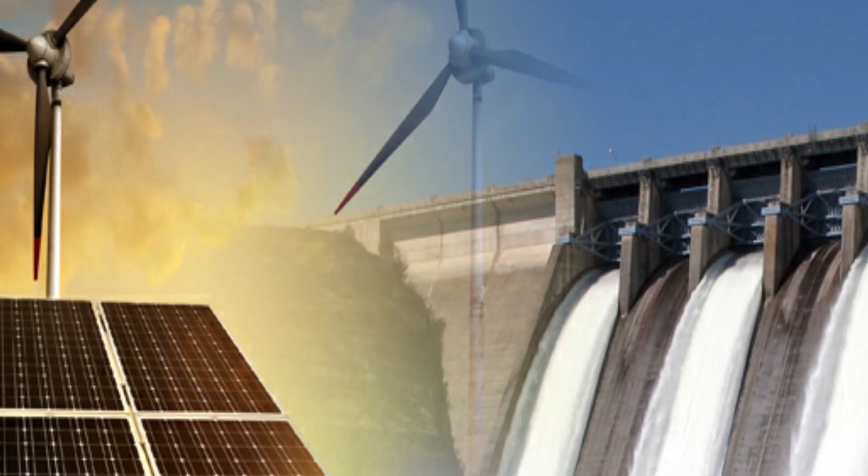Nowadays, demand of renewable energy sources is increasing in every country. If you take non-renewable energy sources like thermal power plant, nuclear power plant, etc., they are not good for the environment and they can exhaust any time in future due to lack of fuels. But if you take renewable energy sources, they are not like that. They are good for the environment and they can't exhaust any time in future.

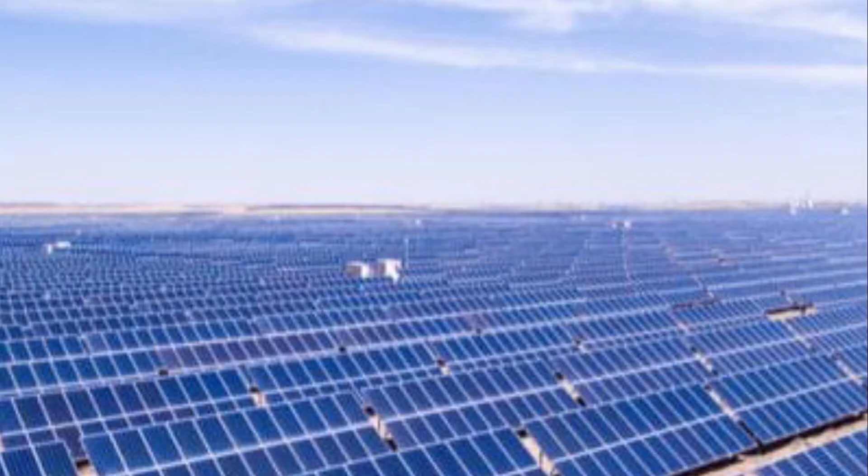Among all renewable energy sources, solar energy is used in more applications like solar homes, solar street lights, solar vehicles, etc., because it's easy to install, takes very less space, and requires low maintenance.

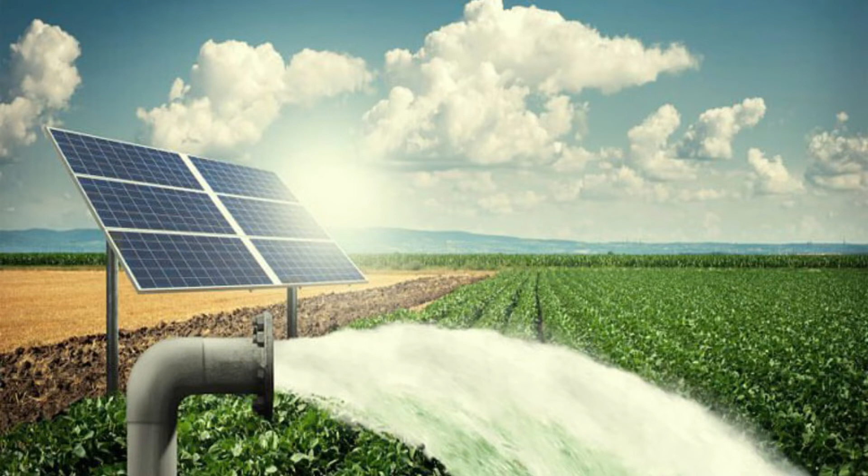So here my idea is like all other solar applications like solar home, solar street lights, solar vehicles. Here I am taking solar water pumping system, because we know water is required for drinking, irrigation, domestic use, for livestock, and for industrial use. So water pumping has become an indispensable task in day to day life.

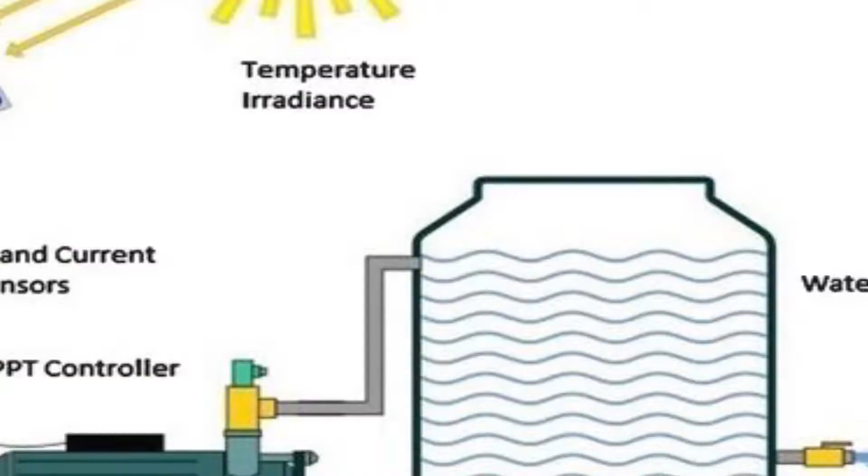If you run a water pumping system with solar, that can be a beautiful innovation. Actually, we have so many solar water pumping systems already existing now. But the problem with those solar water pumping systems is that the output of the solar system depends on irradiation and temperature. Actually, temperature and irradiation are changing with respect to time, they are not constant. But our load requires constant power.

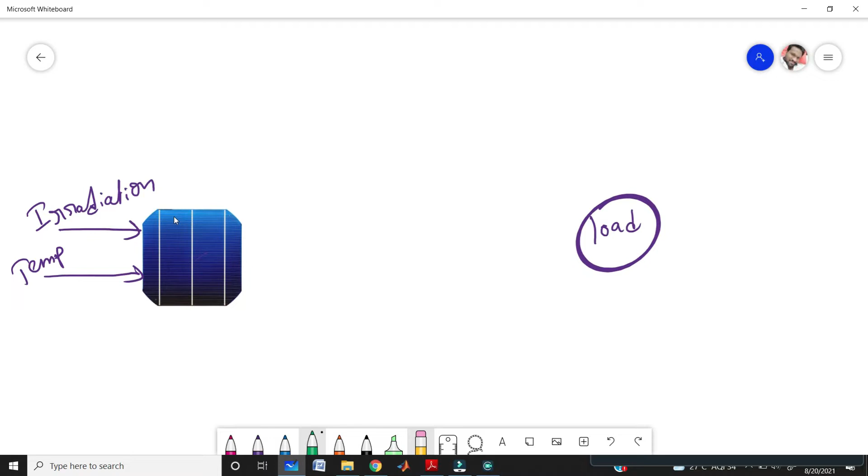What is our load? Here I am taking a water pumping system. Most of the water pumping systems use motors, nothing but induction motors. That's why here also I am taking the induction motor as my load. So we already know induction motor, or any load, requires constant supply, constant power.

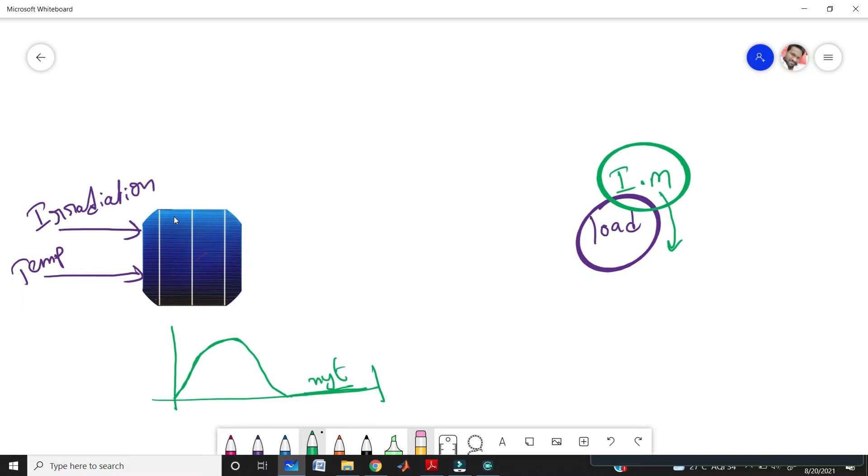But in our solar system, we are not getting constant voltage or power. We are getting variable power or voltage. If you take morning 6 to evening 6, it will increase, and in the afternoon you are getting the maximum power, and in the evening you will get low power, and at night time it does not give any power to the load. That is the solar system. So here we have two major drawbacks: we are not getting constant power at daytime, and also we are not getting power at night time.

So we need to eliminate these two drawbacks. To eliminate the second drawback, that is to give power at night time, we need to go for another alternative, nothing but another source. We have so many sources, you can take battery, you can take microgrid, like that.

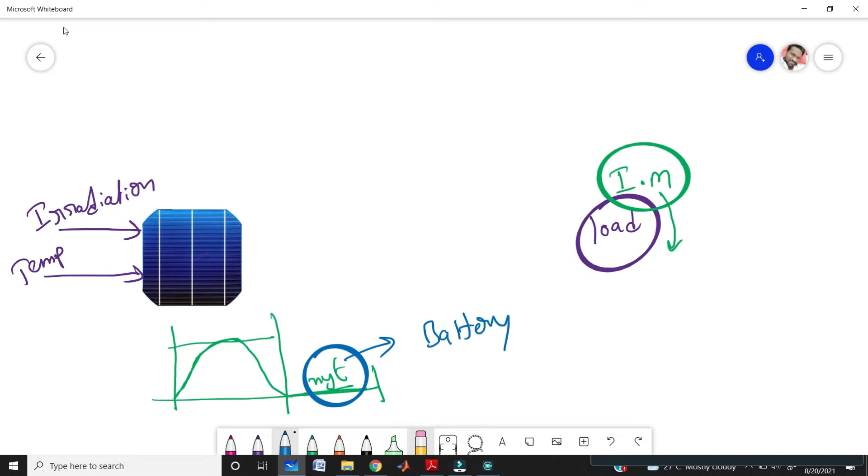So if you have an alternate source as battery, here my thought is, in daytime we already get power from the solar, right? So in that power we are storing in daytime, so at night time I can give this stored power to our load. So like this I am thinking.

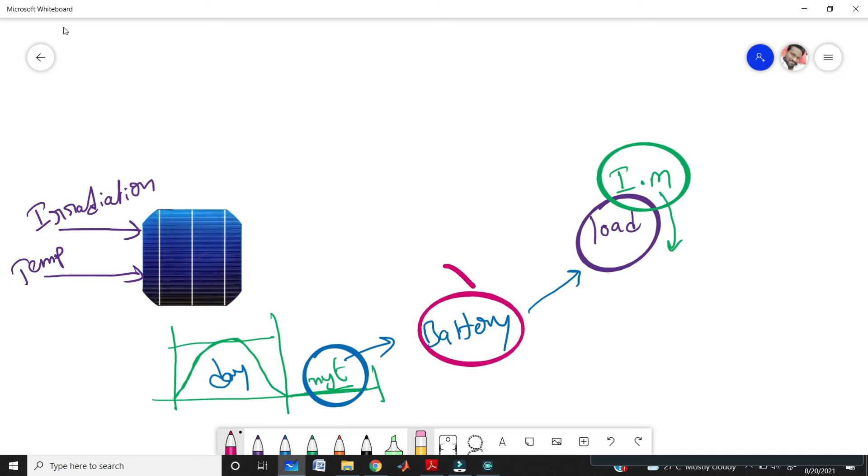But the problem with batteries is there are many complications, such as low life, hazardous waste, and you can see acid leakage in lead acid batteries. For these reasons we are not going to take batteries. We need to choose another alternative because batteries have some drawbacks.

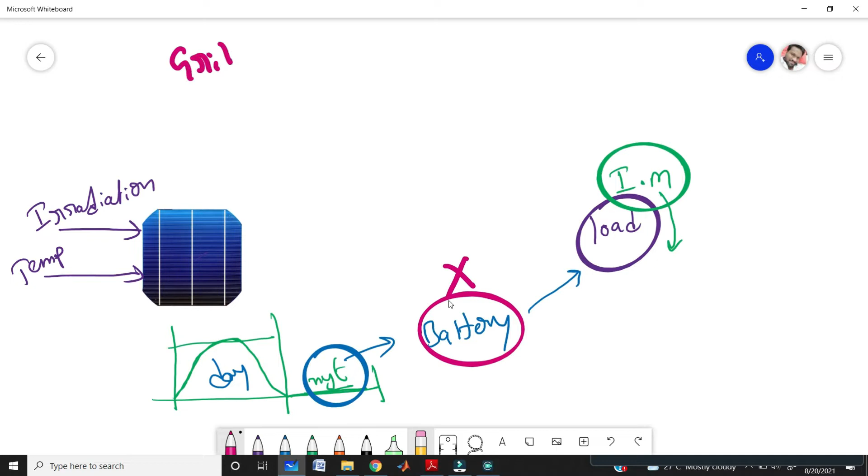That's why I am looking for a grid connected solar system. So here I am taking the grid, simply eliminating the second drawback, that is nothing but this nighttime drawback, with this grid, because we can get power from the grid at any time, right, to our load.

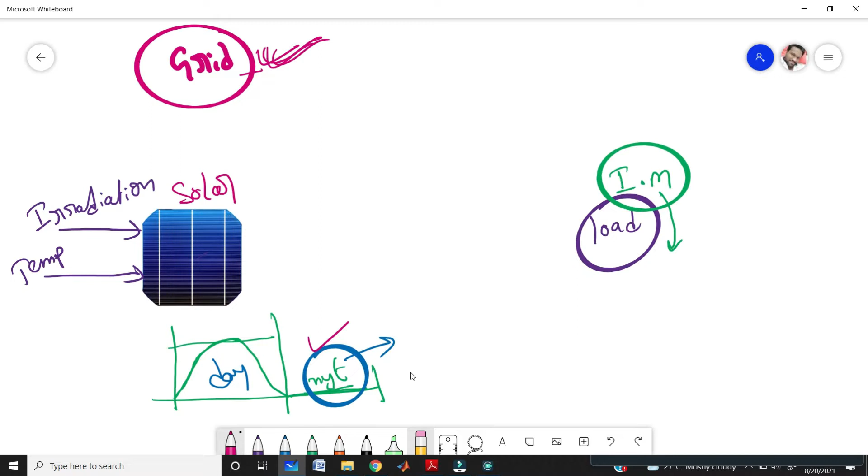But our main thing is we need to run our motor by using this solar power only. Whenever this solar power is not available, at that time only we need to depend on this grid. That is the main thing you need to know. At night time, and at daytime also, you are not getting the exact power required for our load in some cloudy conditions. In that time also we need to take power from the grid to match the load power. And the first drawback is, in daytime also you are not getting the constant supply, right?

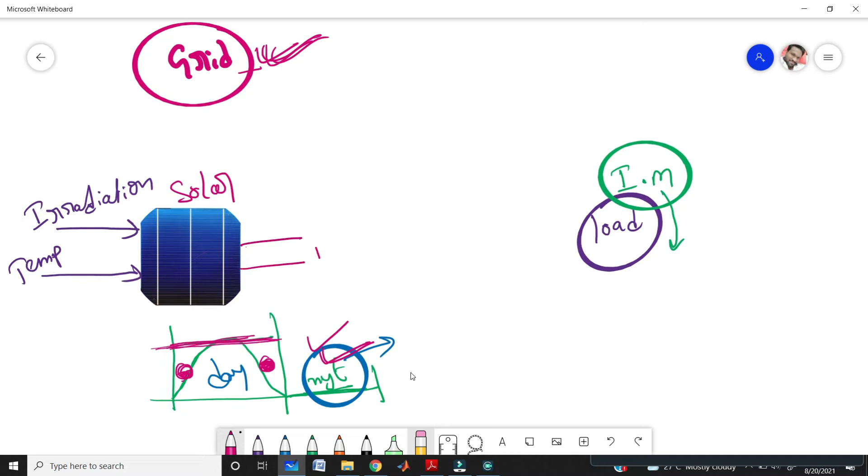So to meet the constant supply, or to meet the demand power, we need to use an MPPT technique with some boost converter. Why boost converter? Because in solar we are not getting the exact power what we required for our load, right? We are getting low power. So to extract maximum power from the solar panel, we need to use the maximum power point tracking technique with this boost converter. So by using these two devices, you can get the maximum power from the solar panel to meet the load requirement.

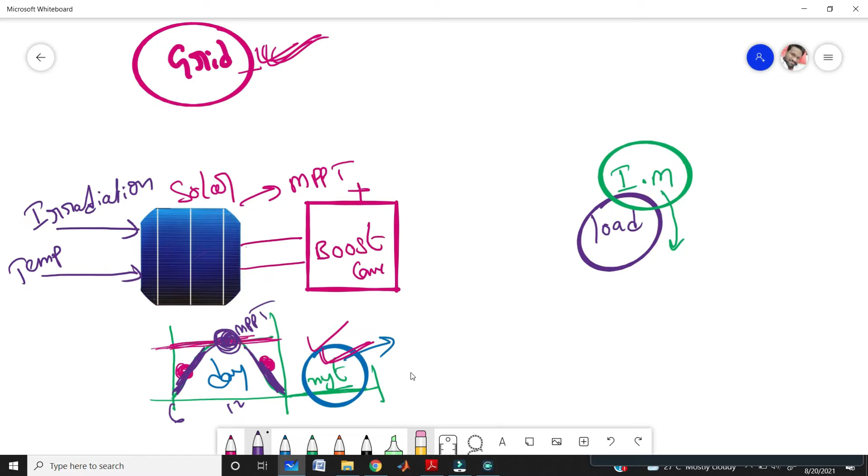Okay, because if you see this graph, from morning 6 to afternoon 12, you are not getting the maximum power. Whenever the irradiation and temperature are high, only at that point you are getting the maximum power. In remaining time, morning and evening, you are not getting the maximum power. So in that time you need to extract the maximum power available from your solar panel. For this condition we can use MPPT with our boost converter to increase the voltage level. So like this we can eliminate the first drawback also.

We have so many maximum power point tracking methods like incremental conductance, perturb and observe, and hill climbing, and so many others. But here I am preferring incremental conductance maximum power point tracking for our project. Why IC only? Because this MPPT is simple to handle and has good tracking efficiency. It also adjusts the step size automatically to reach the maximum power point and improves the response under steady state and dynamic conditions. That's why I am taking incremental conductance as our MPPT technique.

But the thing is, we know this induction motor - the name indicates induction means it needs AC, right? But we are getting DC as the output of the solar cell. After connecting this DC as input to the boost converter, at the output of the boost converter also you are getting DC. But our load, the induction motor, requires AC, right? So to convert this DC to AC, we need to connect a DC to AC converter, nothing but an inverter. After connecting this inverter, you will be able to get AC and you can give this AC to your induction motor. So here I am using a 3-phase inverter because our load is a 3-phase induction motor load. Why inverter here? To convert DC to AC we are using the inverter, because our induction motor needs AC only, not DC.

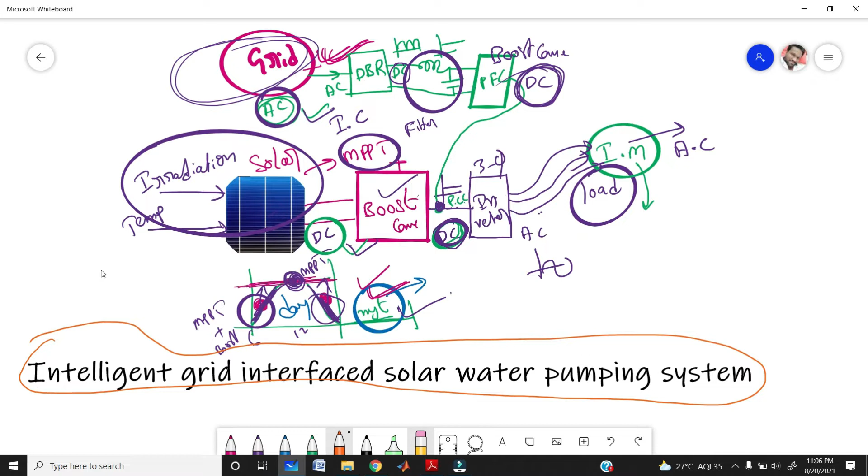So that's our title. Now you can easily understand our project title, which is intelligent grid interfaced solar water pumping system. Here we are interfacing grid with solar to our water pumping system, which is the induction motor. The power sharing between these two is in a very intelligent manner, meaning thinking manner. That's why I'm using the word intelligent, and that's why our title looks like this: intelligent grid interface solar water pumping system. I think now you can get a clear idea about the title justification, how you can justify your title like this at your presentation.

Now let's look into the circuit diagram. This is the main circuit diagram of our project. As I explained before, here they are taking solar power, and after that a boost converter with MPPT to get the maximum power from the solar system. Here you are getting DC, and after the boost converter also you are getting DC. But our induction motor requires AC, so to convert this DC to AC, they use an inverter, which is the three-phase inverter. This three-phase inverter converts DC to AC, which is then given to our induction motor.

Coming to the alternative source, that is the grid. Here I am taking it towards the AC grid, since the name itself indicates it is AC. But to connect this AC to our solar system, you need to convert this AC to DC, so I'm using a diode bridge rectifier to convert AC to DC. But at the bridge rectifier output, you don't get pure DC, only pulsating DC. So to convert this pulsating DC into pure DC, we need some filters. This is the LC filter I am using here, a passive filter, to convert the pulsating DC into pure DC.

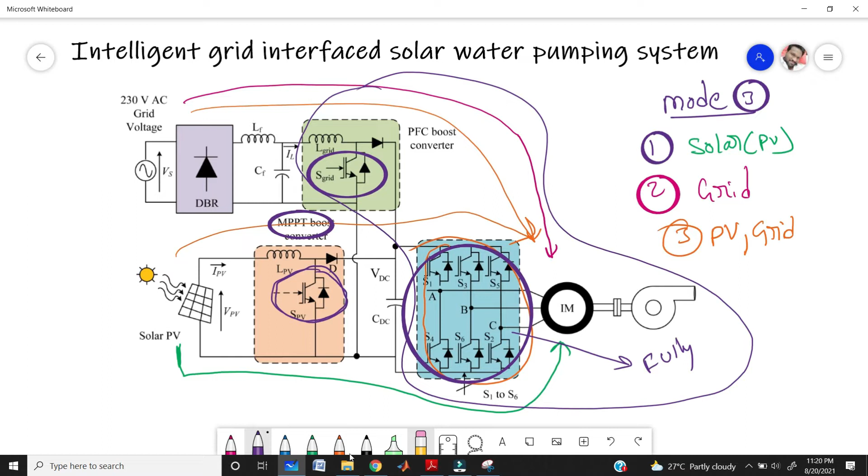So to generate these pulses we have the pulse width modulation technique, PWM technique. In PWM techniques we have so many types. Here I am using the sinusoidal pulse width modulation technique in our project, because that is very simple and very easy to generate.

The main process of sinusoidal pulse width modulation is, the name itself indicates sinusoidal. In sinusoidal PWM we have two waves: one is the reference wave, and it is always a sine wave as the reference wave in sinusoidal PWM, that's why the name indicates sinusoidal pulse width modulation. The other wave can be whatever you want - triangular, trapezoidal, sawtooth, whatever it may be. This second wave is the carrier wave.

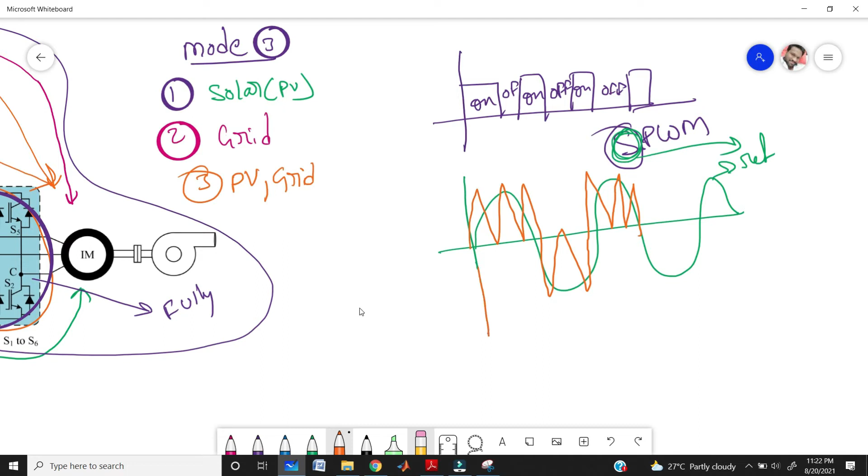In pulse width modulation we can give conditions. Whenever the carrier wave is greater than the reference wave, we turn on the switch - this is the first condition. The second condition is, whenever the carrier wave is less than the reference wave, we need to turn off our switch. Like this you can give the conditions.

So if you take from 0 to some time t1, at this time, is the reference wave greater or the carrier wave greater? Obviously the carrier wave is greater, right? So the first condition is true, then the switch will be on. So during 0 to t1, switch 1 will be on. And during the next time interval, is the reference wave more or the carrier wave more? Obviously the reference wave is more.

Means the second condition is true, that is nothing but the switch is off. And next interval, again carrier wave is more, again switch will be on. Again off, on, off, on, off. So like this you can generate your switching pulses.

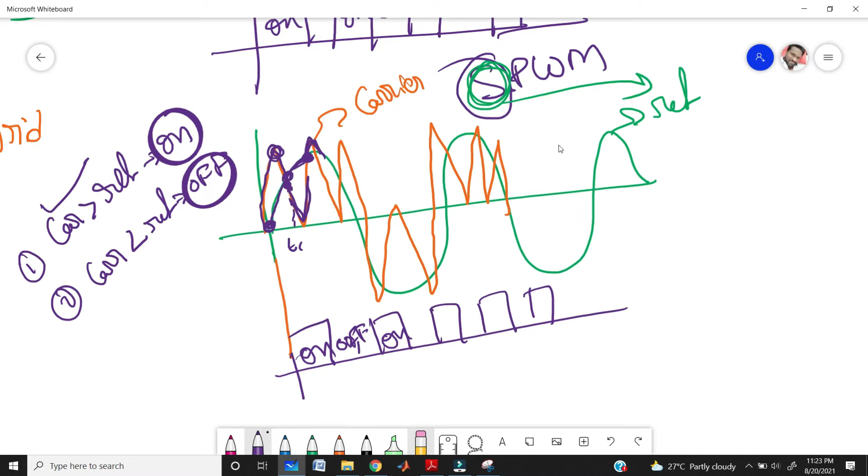In our project we need to get two values, that is nothing but the reference value and the second one is carrier value. So how we can get these two values? From the control system you can get these two values. If you take any control system, it will be like this only. You can take some positive here and some negative here, and give it to some PI controller, PR controller, whatever it may be, and give it to your switching pulses, nothing but on off like that.

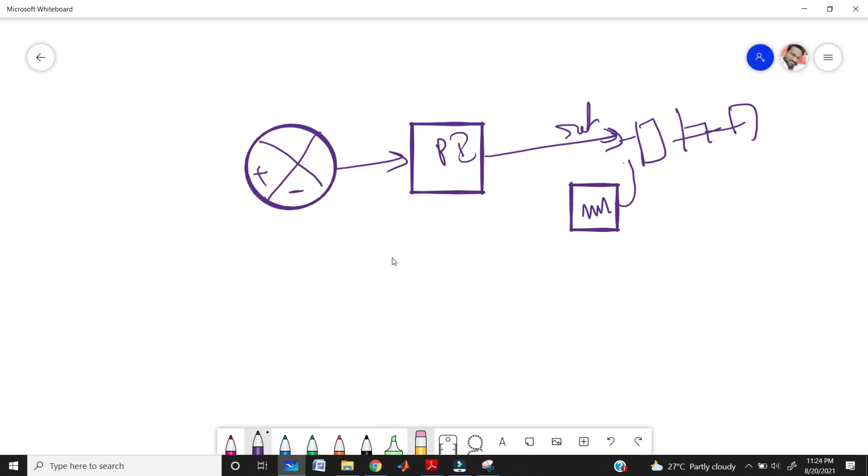So here this is the reference value you can get, and we need to take one carrier value, that is nothing but you can take another separate block like sawtooth or carrier wave, like that. Then you can give it to the less than greater than condition and give it to switching pulses. This is the common control system block.

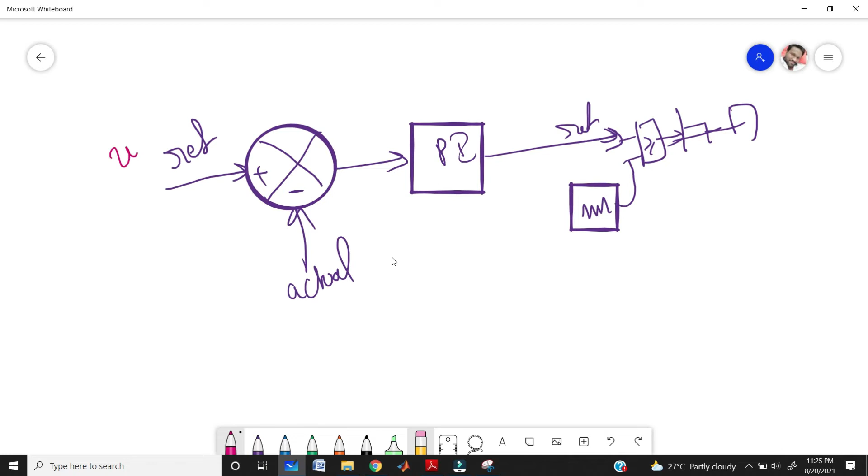So here in positive you can take it as a reference value, and in negative you can take the actual value. Reference value is nothing but whatever you want at the load. Our motor rating is 240 volts AC, then that is the reference value. And what is the actual value? The actual voltage you are getting at that point.

Means at morning 9 a.m., whatever power you are getting from the solar system, that is the actual value. It's 100 volts, but you need 240. So this is plus and this is minus. Then you will get 240 minus 100. The error is 140. So here you are getting the error value of 140.

So then this PI control will tell our system that because you are not getting the exact voltage, you need to depend on another source. So here grid will be on, and the remaining voltage will be taken from the grid. So like this the control system will operate.

So at another condition, at 12 o'clock, if you get the exact power of 240 volts, at that time this is 240 volts and the actual voltage also you are getting is 240 volts. So here the error will be 0, right? So here you are not getting any error, meaning you are getting the exact power required for your load. So here there's no need to depend on the grid.

So like this, with the help of this control system, you can control the whole system. Here I am taking only voltage as an example, but like this you can control the current also. Okay, so let's see our complete control diagram.

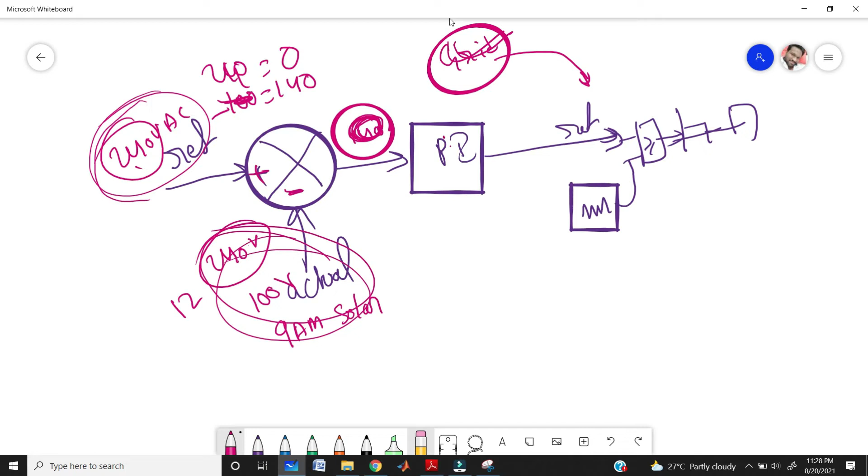So this is our complete control diagram for our system. Here you can use scalar or voltage frequency control algorithm. So just before I explained for only voltage, so like this they are also taking the voltage VDC reference and VDC actual. Like this they also take the current IL reference and IL actual.

Okay, and give it to the PI controllers. So this is the PI controller I am taking here, and this is another PI controller I am taking here. Okay, and we will give it to the pulse width modulation generation, nothing but this is the carrier wave, as I already told you.

You can take sawtooth, trapezoidal, triangular, whatever it may be, and this is the actual value we are getting, nothing but the reference value. Okay, and this is the carrier value. So we can give it to the less than greater than condition, and we can turn on and turn off the switches. That's it. The bottom also you can generate the pulses.

So here I am taking the solar panel voltage and solar panel current. I am getting the solar panel power because we know P is equal to V into I. That's why I am taking voltage and current and I will give it to the multiply operator. Then you will get the PPV.

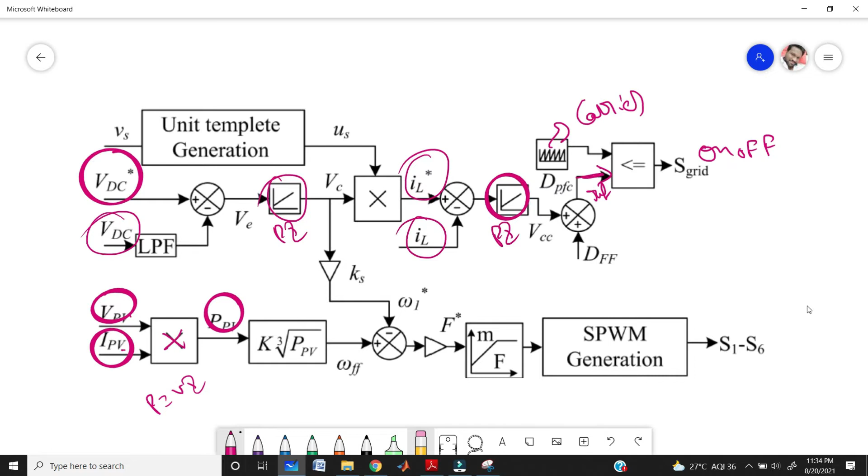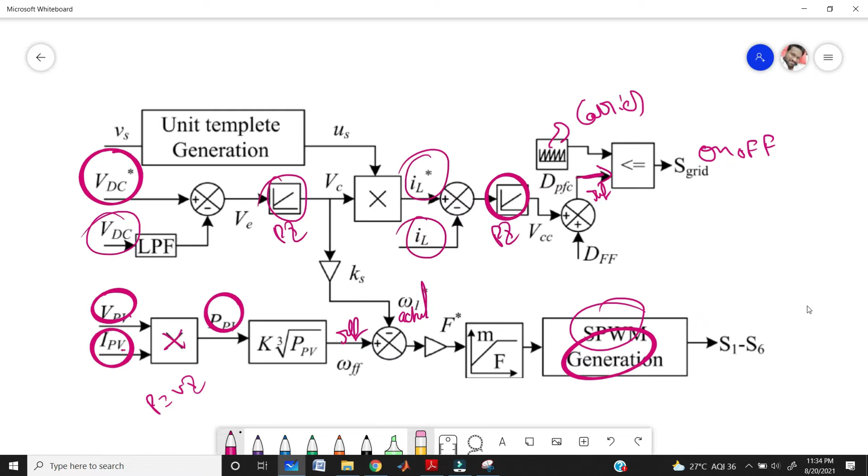So solar panel power I am getting here, and this I am taking as the reference, and here I am taking this as the actual. Okay, and again I am giving it to the sinusoidal pulse width modulation, and I am generating the switches for our inverter. That's it. This is the simple control technique I am using here.

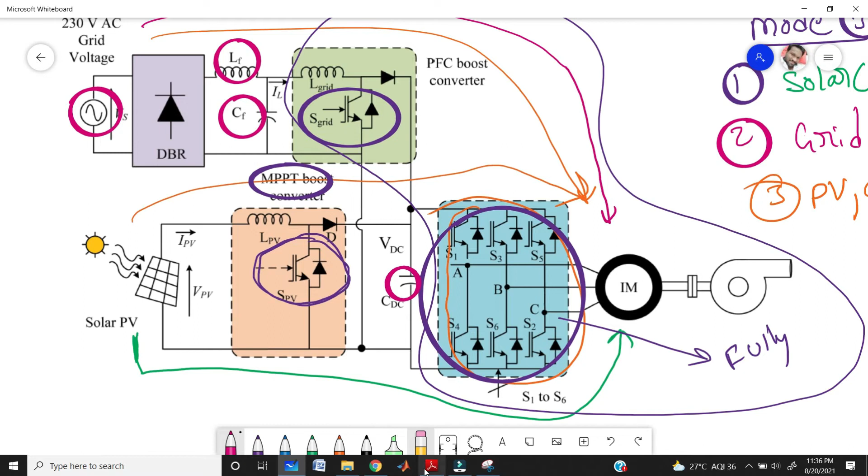I will provide one table. Here is our design parameter table. First of all, you need to generate the reference DC voltage, that is VDC reference, because it has the star mark. We know the expression VDC is equal to 2 root 2 VLL by root 3. We know VLL is nothing but the grid voltage, 230 volts. If you take this VLL 230 here, 2 root 2 into 230 by root 3, then you will get 375.6 volts. That is the calculated value, and you can use the nearer round figure value, 400 volts.

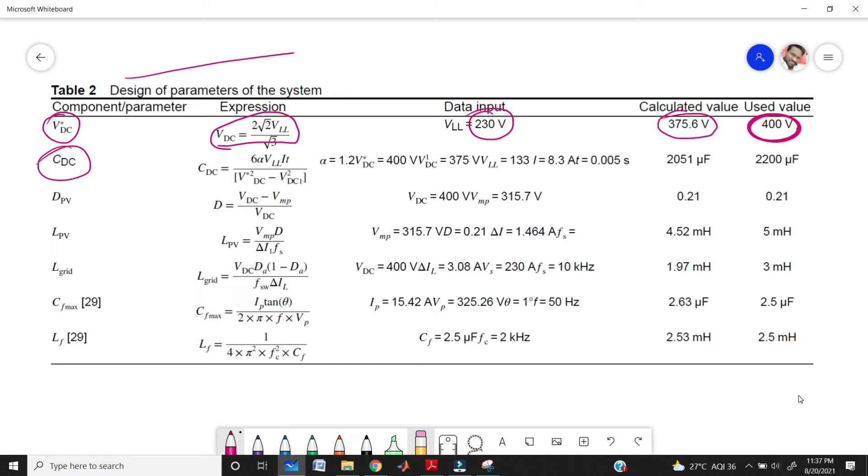Coming to CDC, capacitor of DC. You can see this CDC in our circuit diagram, this is the DC link capacitor. So this is the CDC, right? Here we have the CDC. This value I have calculated here.

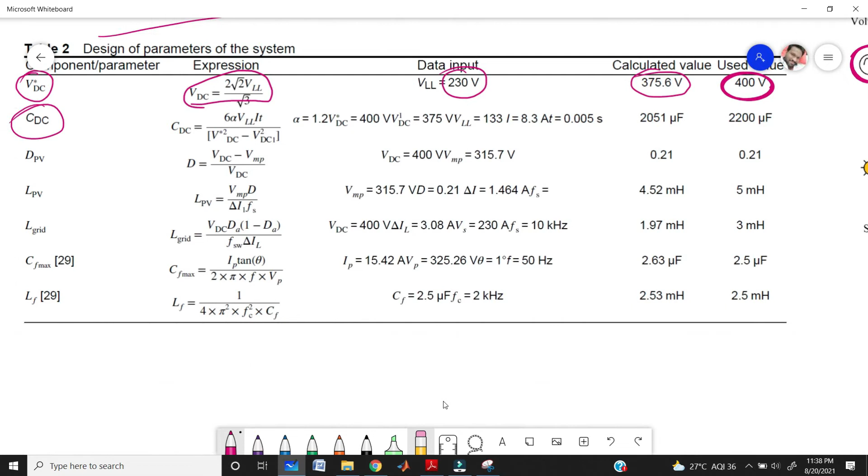CDC formula is 6 alpha VLL into I of T, by V reference square minus V actual square. We know each and every value here. Alpha is equal to 1.2. I am taking reference DC voltage we already calculated before, 400 volts. You can take 400, VDC actual as 375, line to line voltage is 133, I is equal to 8.3, and T is equal to 0.005 seconds. If you take all these values in this equation, you will get 2051 microfarads. So you can take 2200 microfarads. This is the capacitor of DC link.

Coming to the D of PV, we know the formula D is equal to VDC minus VMP by VDC. We know the VDC value we just calculated, 400 volts. You can take 400 volts, and VMP is 315.7 volts. Using these two values, you will get 0.21.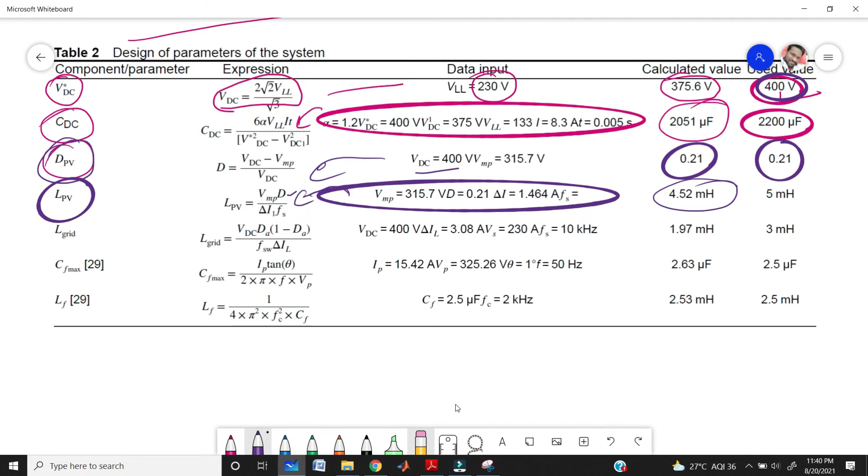Coming to the LPV, this is the inductance of the solar panel. That inductance of solar panel you can get from VMP into D by delta I1 into Fs. We know each and every value here, the VMP value, D value, and delta I value. Put these values in, then you will get 4.52 millihenry. You can take 5 millihenry in our simulation block, then you will get the inductor value. So here we have the LPV, right? This is the LPV value.

And coming to the grid side inductor, this is the formula. Each and everything I will provide you, don't worry. I will give this base paper in the description, you can download it, and in that you can get each and every value like this. I will give it in the description, don't worry. Like this you can calculate each and every element value.

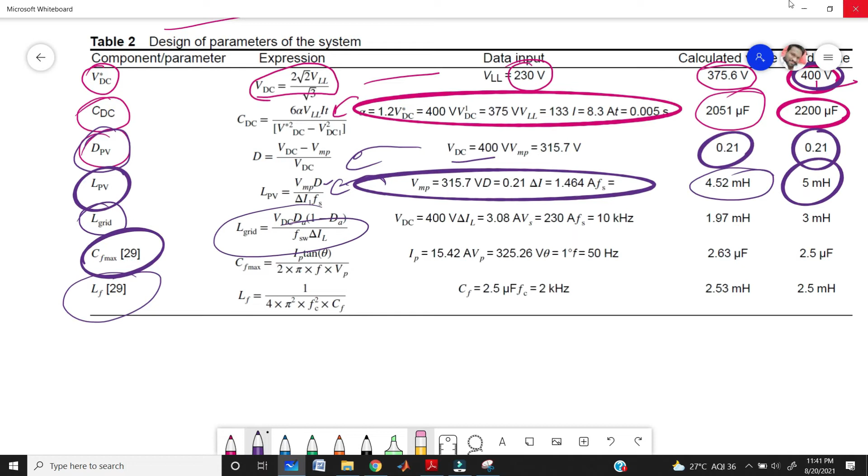And coming to the solar power designing, you need some parameters to design the solar panel also. This is the table for solar panel designing purpose. Here they are giving the parameters and specifications also.

The maximum power module is 210 watts, open circuit voltage is 35.7 volts, and short circuit current is 7.99 amps. They have given the number of modules connected in series and parallel as 11 and 1. They also give the voltage and current of the solar power array at maximum power point tracking: 315.7 volts and 7.32 amps at maximum power point. They also give the maximum power of the SPV array, that is 2.3 kilowatt. Like this they give each and every parameter of the solar panel.

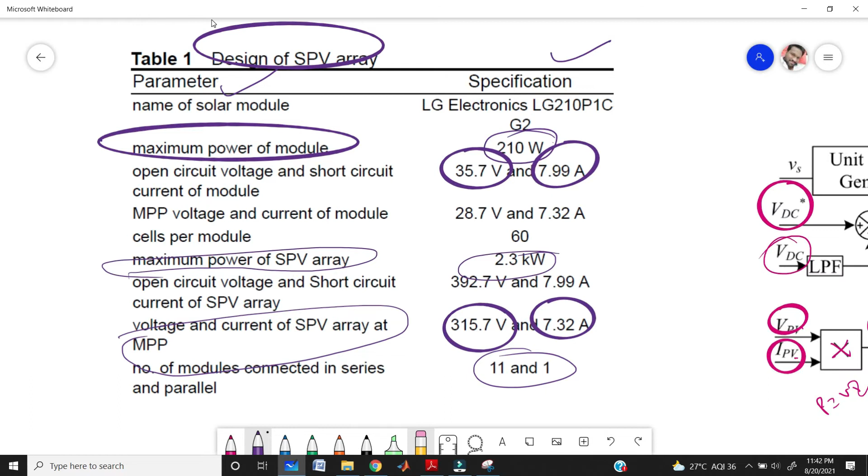So by using this you can easily design your circuit. Now you can see the results. After doing this project you can get results like this.

These are the starting characteristics of a solar pump in mode 1. We have 3 modes, right? In the first mode, as I already told you, only solar cell operates. Here the grid is completely off.

That's why you can see grid voltage and grid current are completely zero. These two, the grid voltage and grid current, are zero because in mode 1 we only get the power from the solar. We are not getting power from the grid.

You can see the motor is started in a soft manner to limit the starting current. So the motor speed is starting in a smooth manner, and after that it will settle at 1200 rpm. The reference speed is calculated by the control scheme, and at 8.6 seconds this point is reached.

Here VPV and IPV are settled to their maximum power point tracking. Only the IPV and VPV give the maximum power here, and they are at steady state. Up to this value it will be increasing - this voltage and current of the solar panel is increasing. At some point it will get the maximum power, and at this point only it will be steady state, at the 8.6 seconds time.

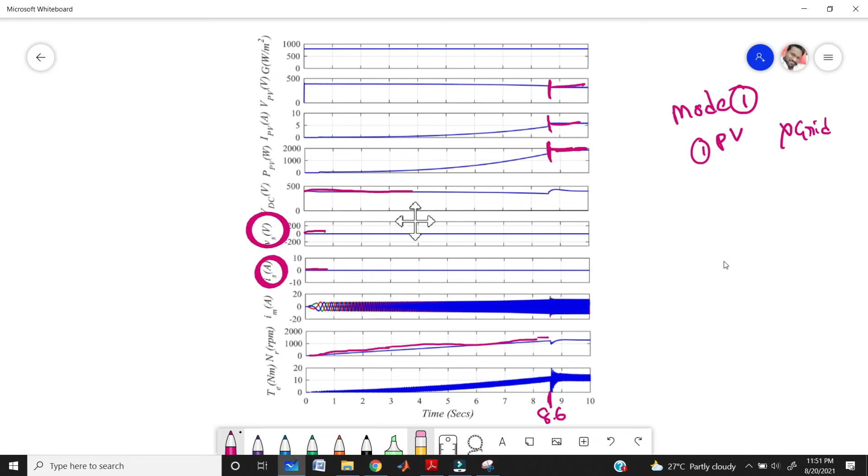The DC bus voltage is maintained to a constant value, which is 400 volts. This 400 volts we are maintaining as a constant value. Now coming to the dynamic state - this is the steady state, and coming to the dynamic state, how will it be?

This is also mode 1, but here we are taking the dynamic state. As I already told you, in mode 1 the grid is completely off, such that Vs and Is are 0, because we don't turn on our grid. We are only depending on our solar system. This is G, the radiation of the solar system. This is the voltage, this is the current, and this is the power of the solar. This is the DC link voltage, and at the bottom are motor current, motor speed, and motor torque. This is the dynamic state - dynamic state means, as the name indicates, it will be changing with respect to time.

Here the slope decrease in radiation is observed at t equals 2 seconds to 3 seconds. You can observe the slope decrease in radiation from 800 to 400 during this time. Again from 3 to 4 seconds, the radiation is increased from 400 to 800. So it keeps changing with respect to time.

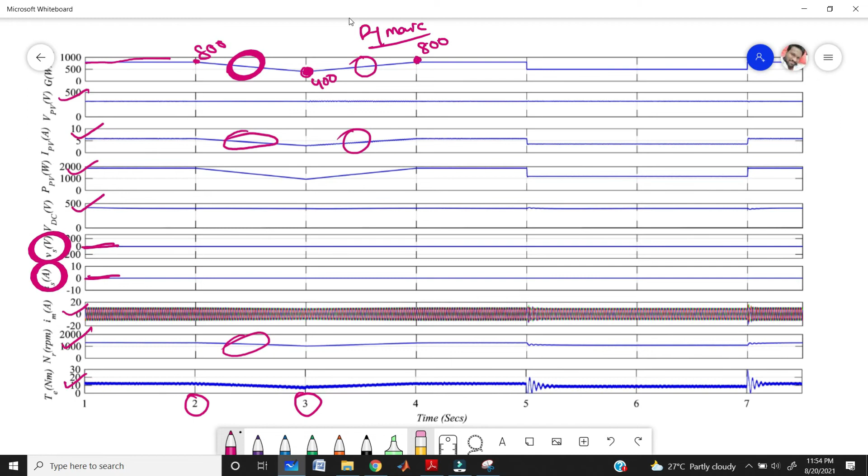With the decrease in radiation, the current of the solar system decreases, as well as the motor speed also decreases. Again as the irradiation increases, the solar current also increases, and the speed of the motor also increases. That's it - these are the characteristics of the dynamic state in mode 1.

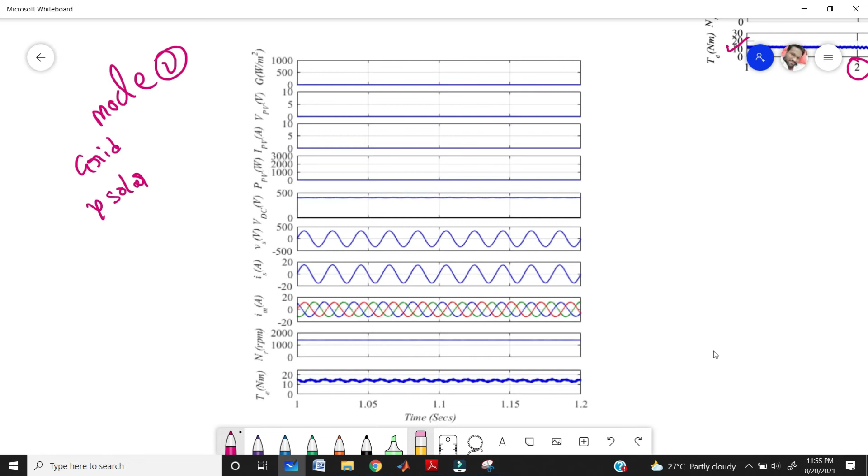Coming to mode 2, these are the mode 2 characteristics, this is also steady state performance. As I already told you, in mode 2 only the grid is connected. Here completely the solar system is off, because you can take it as night time - in night time we don't get power from the solar. That's why the complete irradiation and solar voltage, solar current and solar power are all 0.

This is because we are taking mode 2. In mode 2 the solar system is completely off, that's why you are not getting anything from solar. But you can get the DC link voltage as 400 constant, because you can take power from the grid.

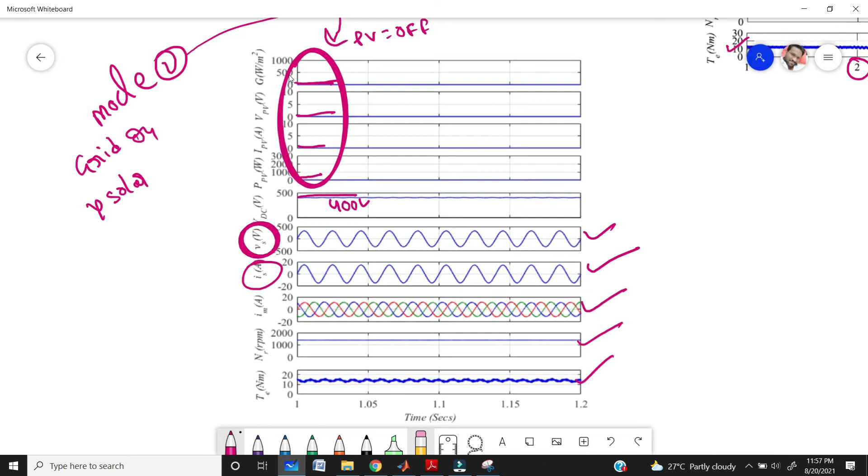This is the grid voltage and this is the grid current - the grid will be on here. As I already told you, grid is in AC format, that's why you are getting the AC voltage and AC current like this. This is the current of the induction motor, this is the speed, and this is the torque. This is the steady state condition, that's why it is not changing with respect to time - it will be constant all the time. That's it, this is the mode 2 operation.

Coming to mode 3, this is the mode 3 dynamic operation. Here in mode 3, as I already told you, both PV and grid will be connected, so we can get the power from the solar and also get the power from the grid.

Okay, so here you can observe from 2 to 3 seconds, irradiation will be decreasing and also current will be decreasing, and also here during 3 to 4, irradiation will be increasing and current will be increasing. But at this mode it can't affect the motor speed. Motor speed is always constant because the remaining power is taken from the grid.

You can observe here from 2 to 3, whenever the current is decreasing, then the current of the grid is increasing, right? So that is covered here. Whenever the current is increasing from 3 to 4, that is also covered here, where grid current will be decreasing. So it can't be effect on the motor. Always motor speed will be constant.

That is the use of power sharing between the two sources. Whenever you get the constant voltage, our waveform will be constant. Whenever changes occur, at that time only current changes, but our speed will be constant. That is the main thing you need to know. And all this came due to that control block only. Whenever the current and voltage changes, we need to change the step size and keep our motor speed constant. That is the main thing you need to know.

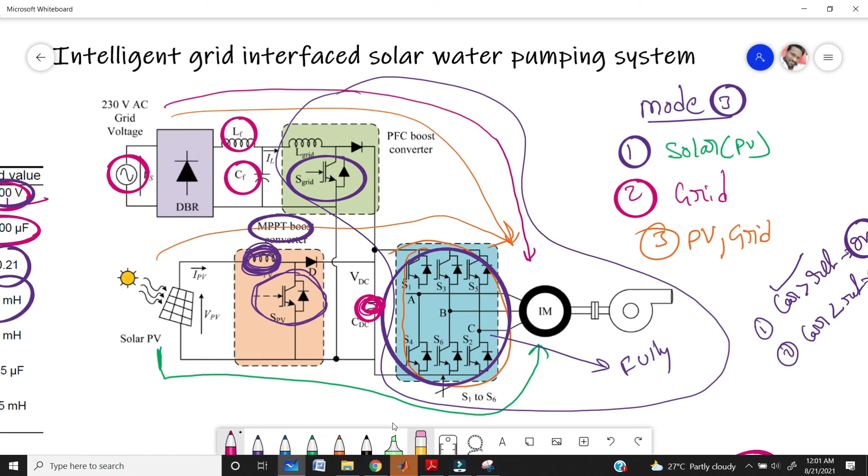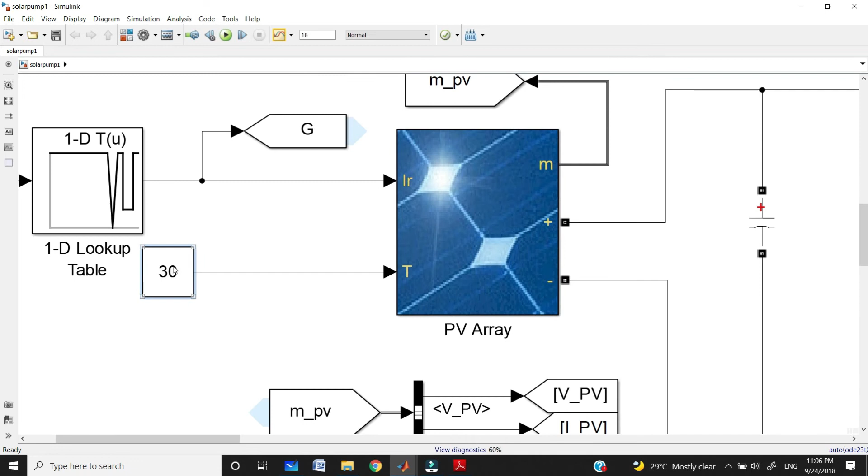Now open your MATLAB. This is the MATLAB circuit for our project. Don't panic about this, just remember what I told before - that only I'm designing here. So first of all we need to take the solar panel. That's why I'm taking the PV array here, and this lookup table will be the irradiation, and this 30 degrees block will be the temperature.

Here I'm taking 30 degrees temperature, and this G will be the irradiation value which comes from this lookup table. Next, we need to give this solar output to the boost converter. That's why I'm connecting this solar output to this boost converter. This simple inductor, IGBT and diode make a boost converter. I already told you this boost converter with MPPT will be used simultaneously. So here I am taking the maximum power point tracking - that is nothing but the incremental conductance. I already told you the advantage of incremental conductance.

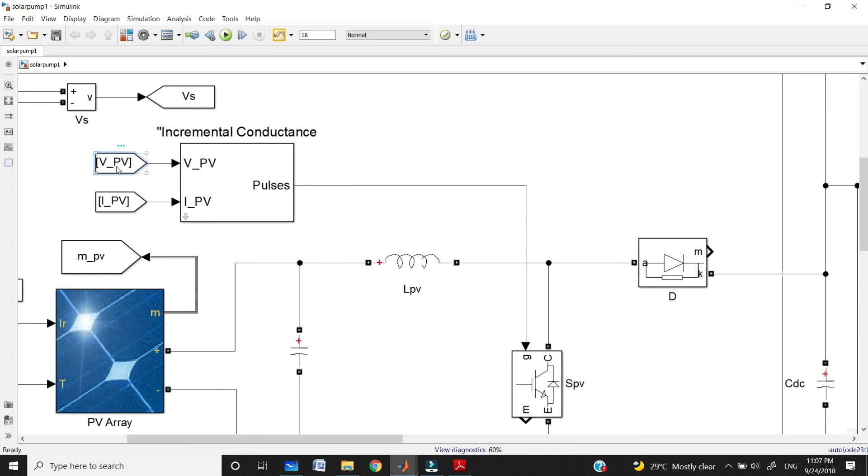So here the input of the incremental conductance will be VPV and IPV, that is nothing but the output solar panel voltage and solar panel current. The two values will be taken from here, VPV and IPV. We have some measurement port in the solar panel, so from this measurement port you can take the voltage and current. After taking the voltage and current values, you give it to the MPPT algorithm here. Then you get the pulses to our boost converter switch.

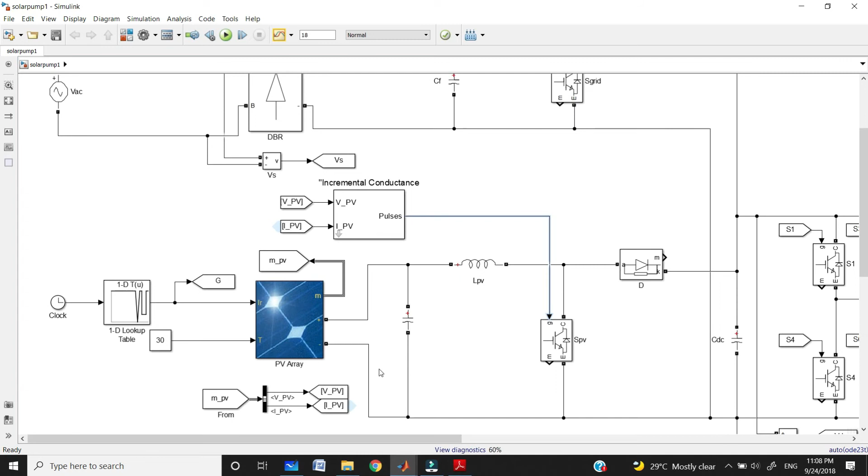After that, actually here we are getting the DC, but our load is nothing but our induction motor - this is the induction motor. This induction motor needs AC, right? So to convert this DC to AC, we need an inverter. That's why I am taking the inverter in between this boost converter and our induction motor. This is the three-phase inverter I am taking because our load is the three-phase induction motor load. That's why I am taking the three-phase inverter here.

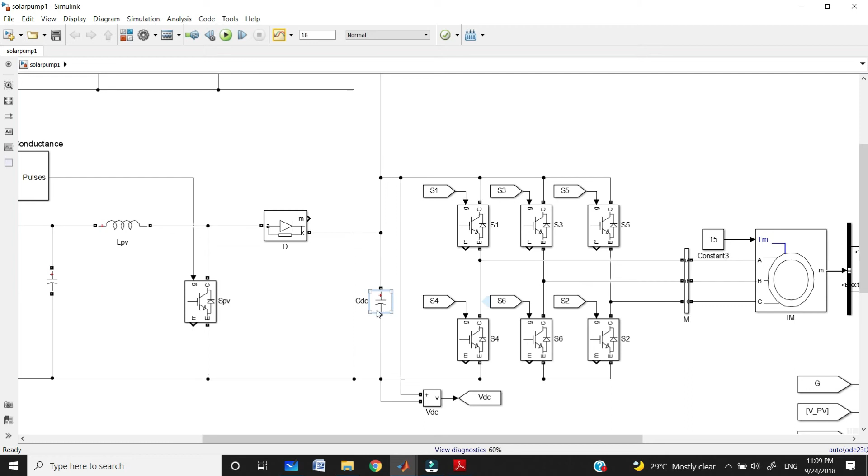These 6 switches make a three-phase inverter. With the help of some DC link I am connecting this, and I am measuring the voltage and currents using voltage measurement and current measurement. So here I am taking the voltage measurement to measure the DC link voltage across this capacitor. We already know in our laboratory how we can connect a voltmeter - we connect it in parallel. So here also I am connecting our voltage measurement in parallel to our capacitor.

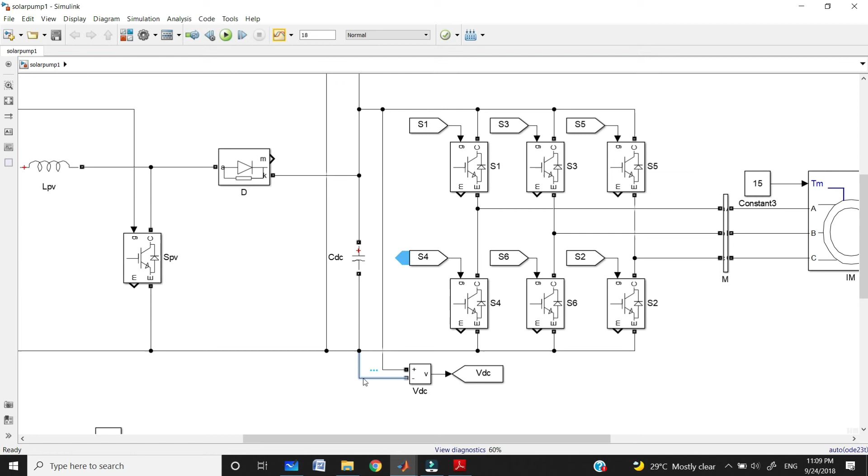If you want to measure the current, you can connect the current measurement in series because we connect the ammeter in series in our laboratory. So like that you can take the current measurement and voltage measurement like voltmeter and ammeter. Okay, for single phase measurement, this is the voltage measurement and current measurement. But if you take three phase, the output of this inverter will be three phase AC, right? So how to measure this three phase AC?

So that's why I'm taking the three phase VI measurement block here. This is the three phase VI measurement block. If you double click on any block, you can know what it is. This is the three phase VI measurement, nothing but the voltage and current measurement. So this one simple block can measure the three phase voltage and three phase current.

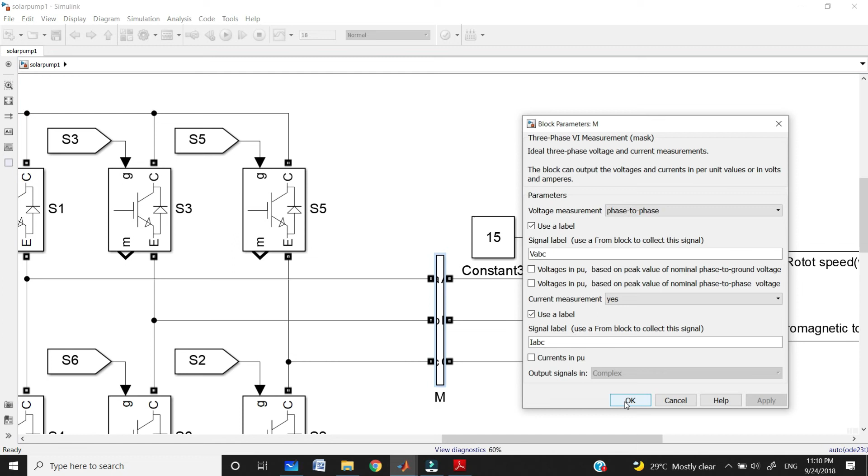No need to take voltage measurement and current measurement separately. If you want to measure this three phase voltage with current measurement and voltage measurement, you need to take the current measurement for each phase. Here we have three phases, right? A phase, B phase, C phase. So you need to take 3 voltage measurements and 3 current measurements. That will be complex, right? That's why we have the inbuilt block, the 3-phase VI block, in our MATLAB. So you can take this one, then you can measure easily.

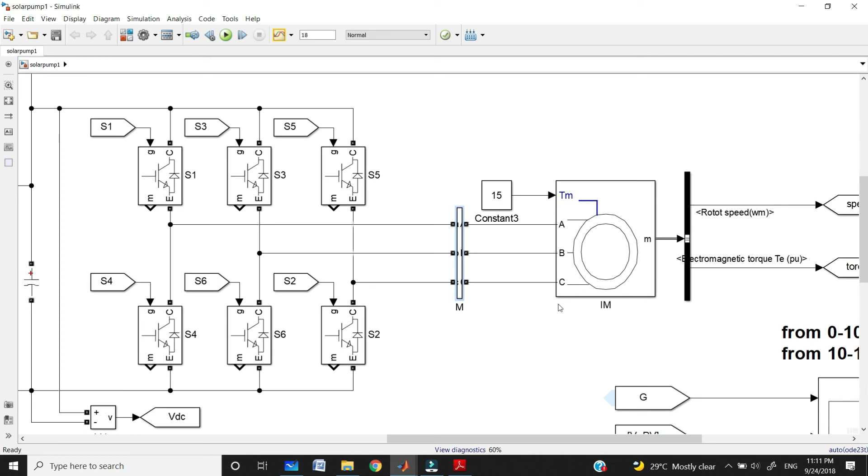So after conversion to AC by using this inverter, you can give it directly to our induction motor. Here I am using the torque. So this TM terminal means the torque of the motor. And finally here we are measuring the motor speed and motor torque.

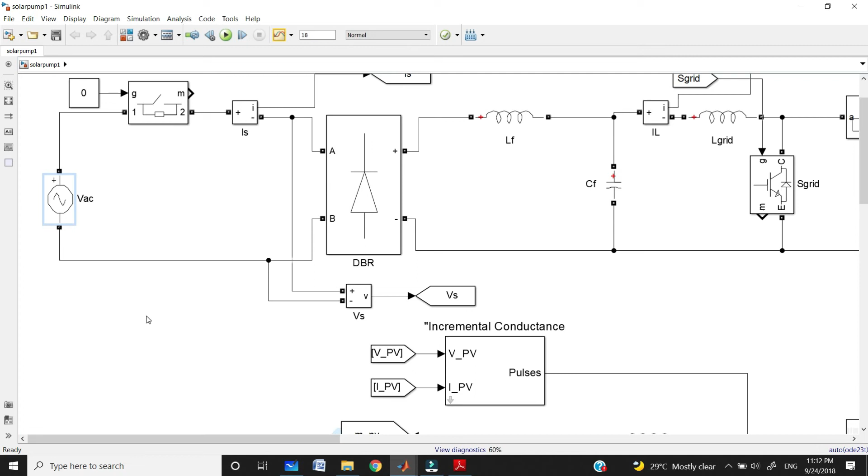And coming to the grid part. So this is the grid part. Here you are taking the VAC, nothing but the voltage of the grid, and give it to the diode bridge rectifier, because this grid means the AC. But to connect this grid to our solar system, output of the solar system will be DC, but this grid system will be AC. So to meet these two, we need to convert this grid AC to DC. That's why I'm using the diode bridge rectifier here. This is the diode bridge rectifier.

So to measure the voltage and current, we need to take the voltage measurement and current measurements here. I already told you this is the current measurement, connected in series. This is the voltage measurement, connected in parallel to measure the grid voltage and grid current. So this Vs means the grid voltage, and this Is means the grid current. Like that you can take it.

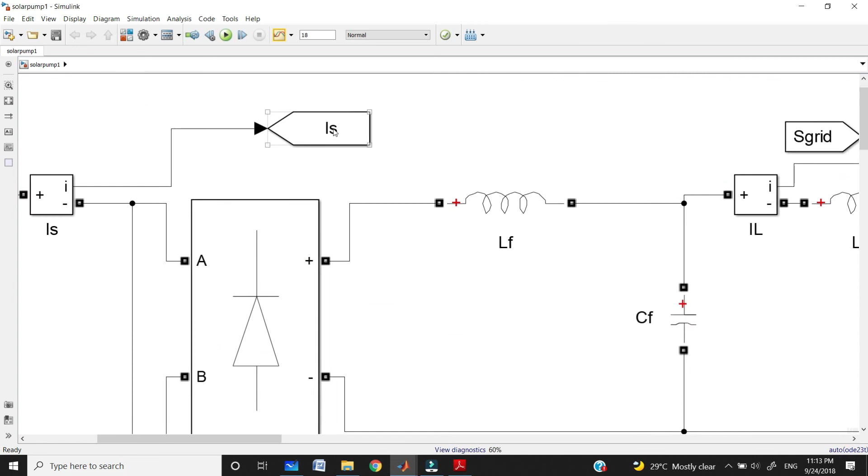And after that, output of the diode bridge rectifier, we are not getting pure DC, we are getting pulsating DC. So to convert this pulsating DC to pure DC, you need to take the passive filter. Here this LF and CF make the passive filter, then you can get the pure DC.

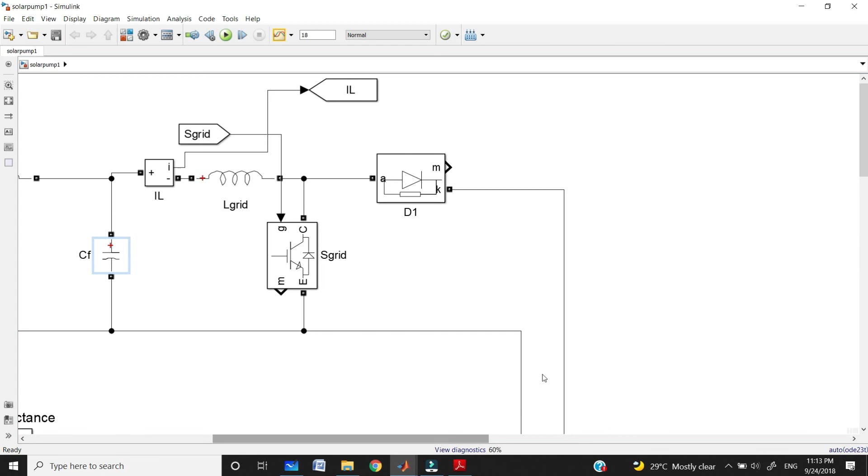So after that, you need to give it to another power factor converter, that is nothing but the boost converter. Here this inductor, this switch and this diode make the grid side boost converter. Then you can get the DC here and give it to the inverter to convert the DC to AC and give it to the induction motor.

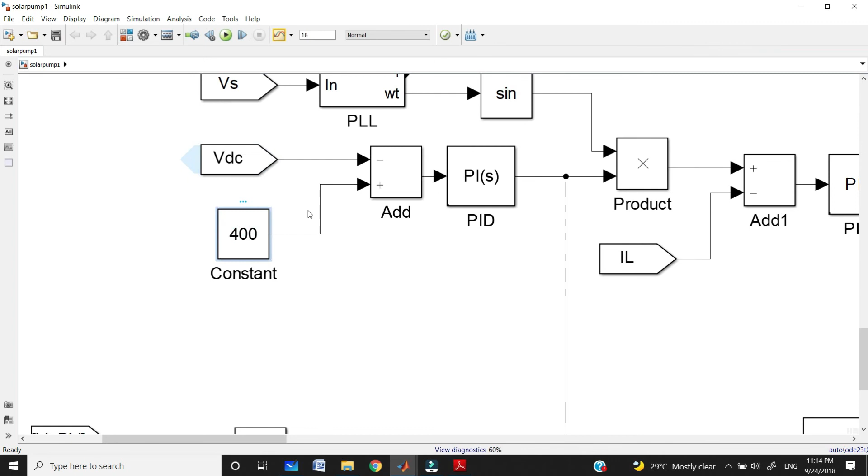So like this you can connect, and the remaining part is the control part. At the bottom you can get the control part. Here I already told you we need to take some reference values and actual values. So here 400 is the reference value and this VDC is the actual value. We can give it to the PI controller. So like that you can control the voltage and current also.

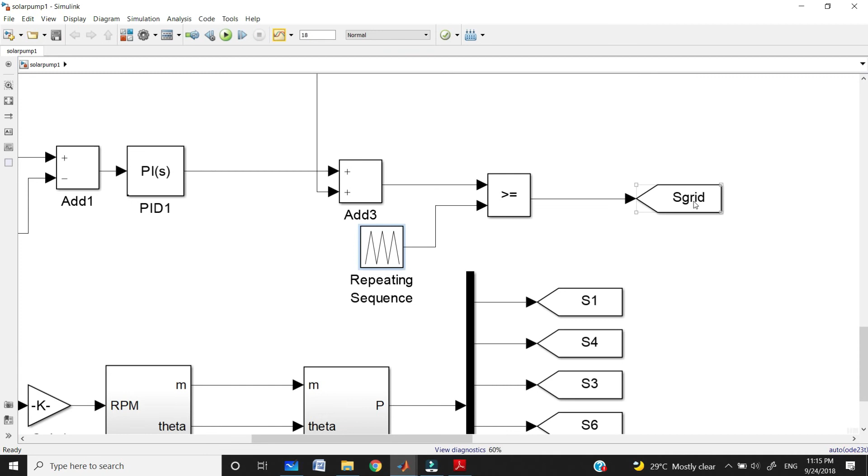Here also you are taking the IL, and here also you are getting some reference value and give it to another PI controller, and give it to the switching conditions like less than and greater than with the help of this repeating sequence, like a carrier wave. Now you can give it to your switches like S grid. S grid means this is the power factor controller switch, grid side control switch. Just double click on this one and click on this blue name, then you can get to know where it came from. So this is the boost converter of the grid side.

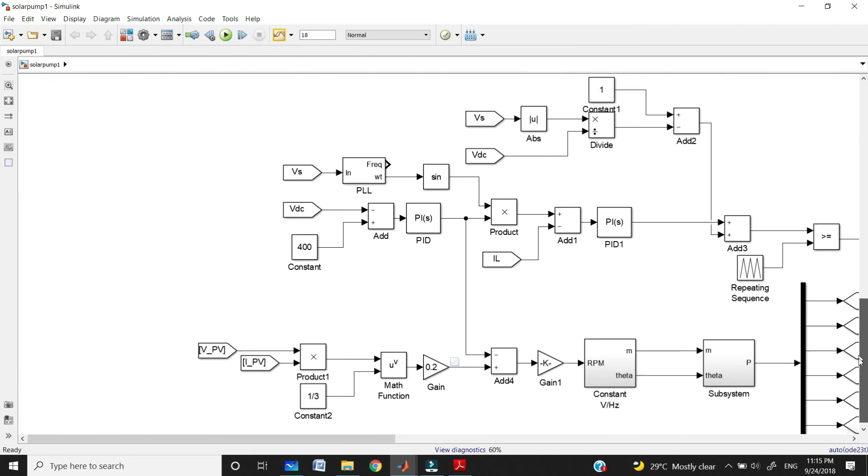So here we are giving the pulses like this. I already told you before, this is the complete control system, so that only I am designing here. Here also I am getting the VPV, IPV, and again we need to give some reference value and actual value here, and again some controller. So like that you can get, for these 6 switches also you are getting the pulses. That's it, this is the complete circuit diagram.

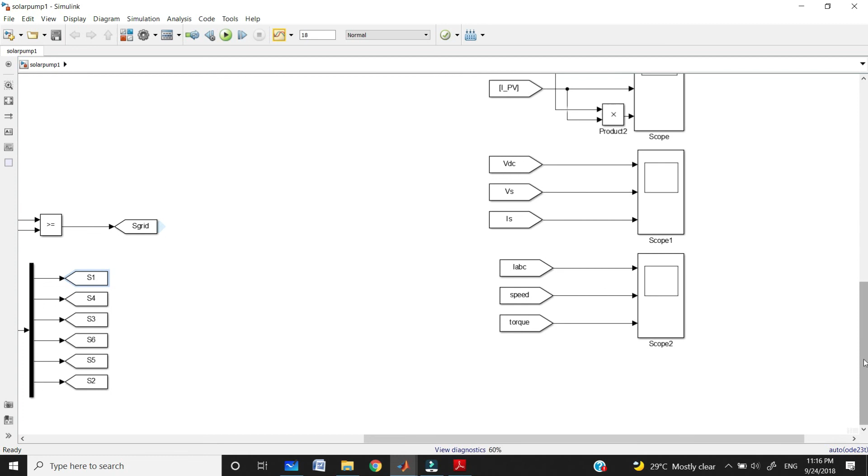And coming to the scope, the scopes are used to see the waveforms. Actually this figure is for only the first mode of operation.

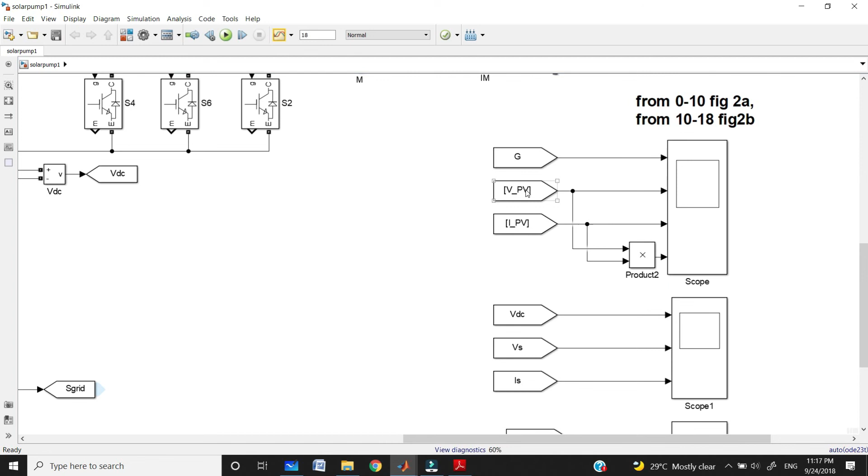I already told you the first mode of operation is only solar panel working, grid is completely off. For second and third mode of operation I have another 2 files, but this is only for the first mode of operation. So let us see how this first mode of operation results will be.

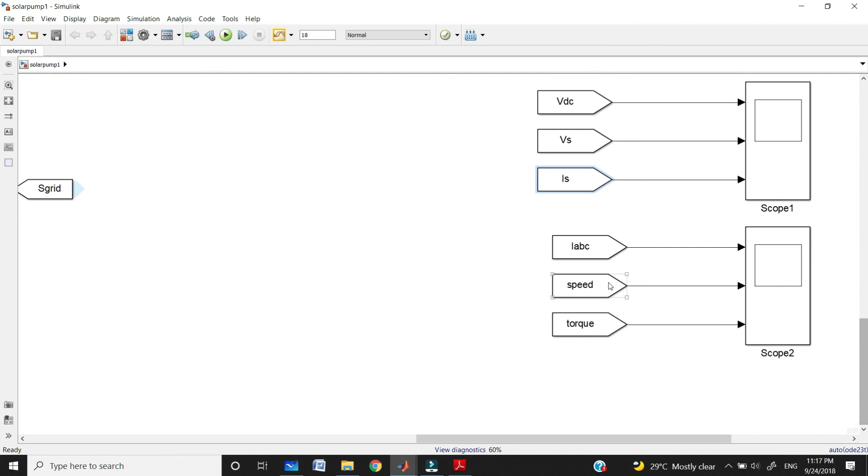These are the VDC, meaning DC link voltage, VS meaning grid voltage, IS meaning grid current. IABC means the 3-phase current that came from the 3-phase inverter, and this is the motor speed and this is the motor torque. So I am taking these to see the waveforms of each and every value.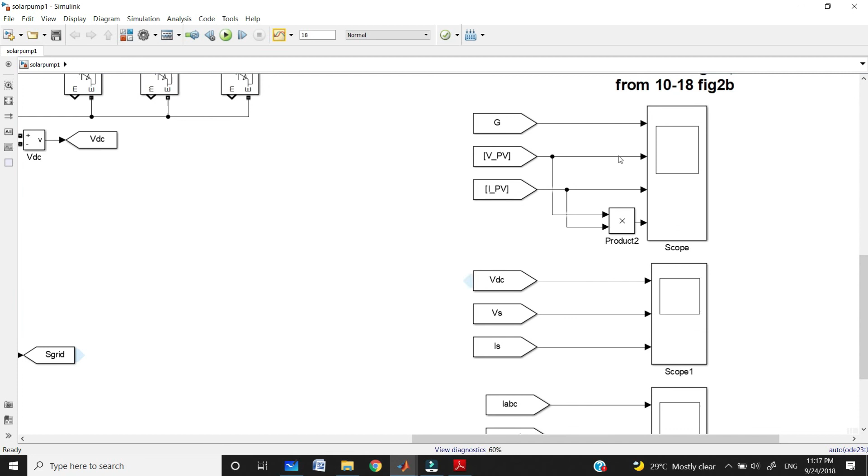Okay, now run your circuit. After completion of running, just open the scope blocks one by one. First of all I need to open this one. So here I am getting the results like this. This is the result I explained before. Okay, exactly we are getting it as per the base paper.

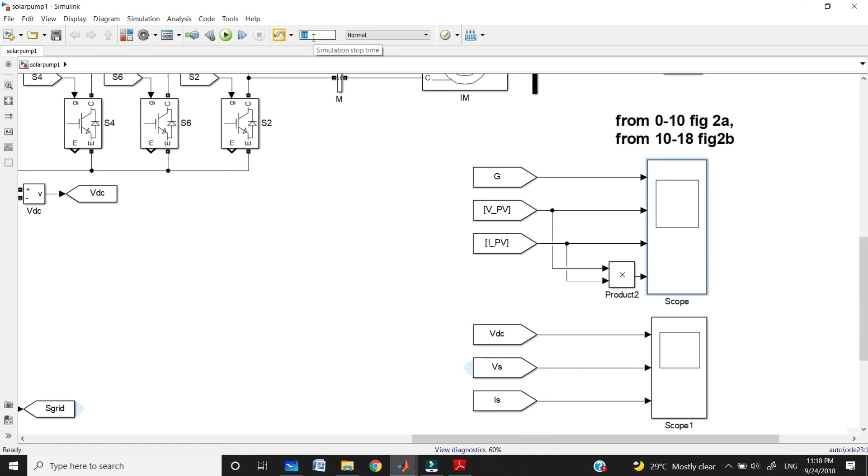Actually the x-axis value will be 18 because I am taking 18 seconds in simulation time. That's why I'm getting the x-axis as 18. In these 18 seconds, from 0 to 10 it will be the steady state operation, and 10 to 18 it will be the dynamic state operation.

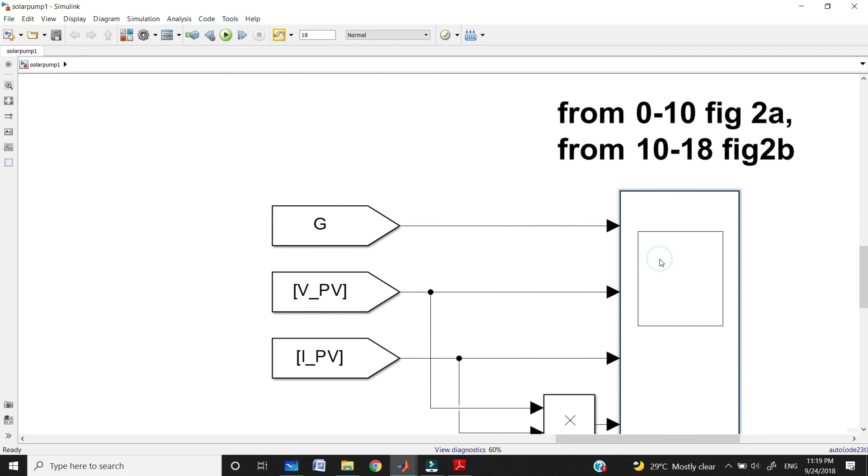Okay, now open the scope. Observe from 0 to 10, this line will be the steady state operation. That's why we are not getting any deviations in this steady state operation. It will simply go to the maximum power point at 8.6 seconds, then it will be steady state. But during 10 to 18 seconds it will be the dynamic state.

So during 10 to 18 seconds you can see the decreasing and increasing in the irradiation. If irradiation is changing, then our current is also changing. So like this you can observe the graphs as I said before theoretically.

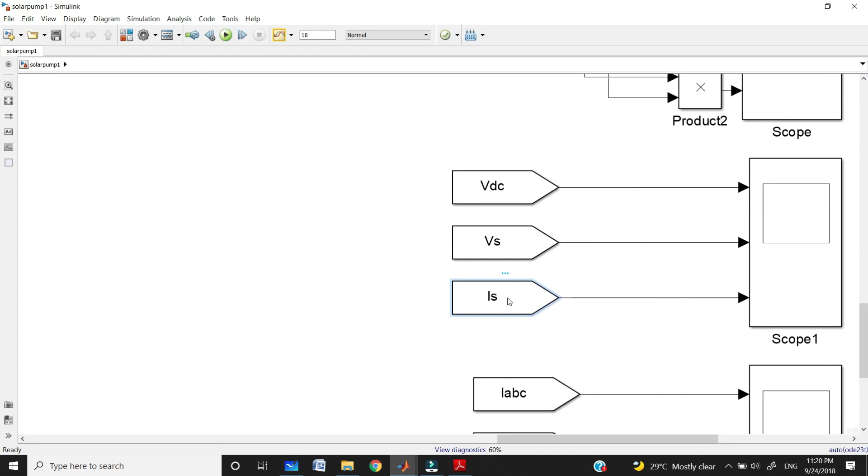Okay, now the next scope is for DC link voltage, grid voltage, and grid current. I already told you this diagram is only for the first mode of operation. In the first mode of operation the grid will be completely off. That's why we are getting the grid voltage and grid current as 0.

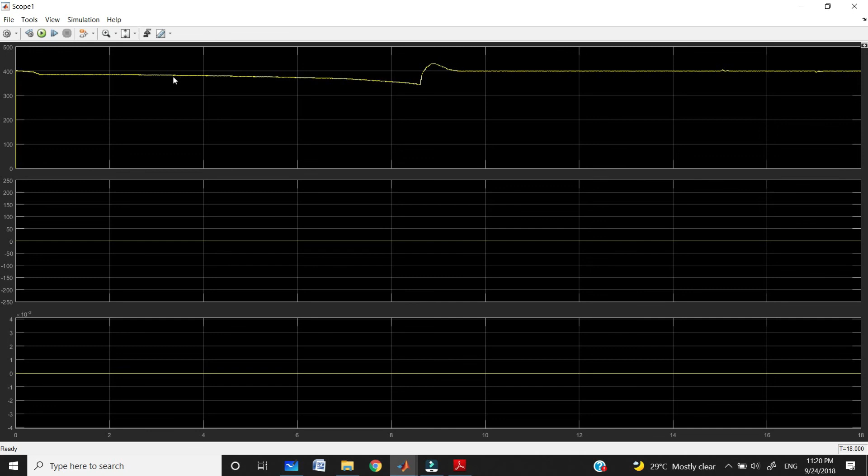This 0 is the grid voltage and this 0 is the grid current, because in the first mode of operation the grid will be turned off. We are getting sufficient power which comes from the solar panel. The DC link voltage will be constant because we are getting power from the solar panel, so that will be a constant voltage, nothing but 400 volts we are getting.

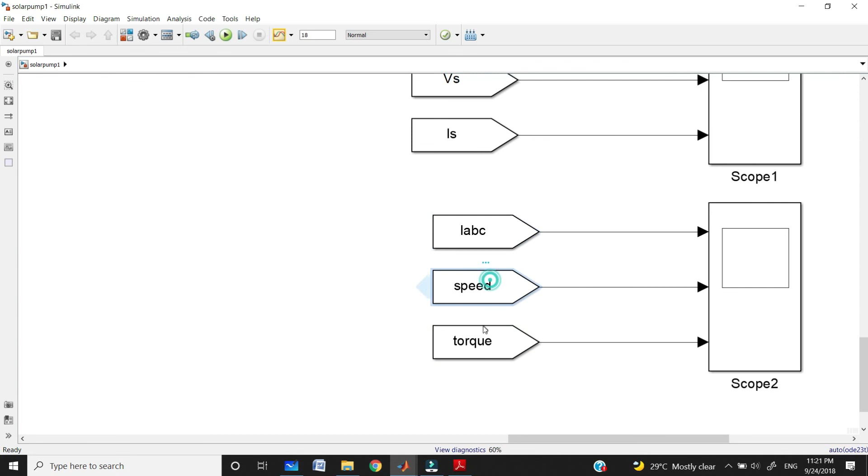And coming to the next one, IABC, speed, and torque - that is nothing but the 3-phase current, speed and torque of our motor. Just double click on the scope, then you will get the 3 results. So these are the results we are getting.

We already know from 0 to 10 it will be the steady state operation, that's why it is starting slowly. Then at 8.6 seconds we get the maximum power point, right? So at 8.6 seconds it goes to its maximum speed, that is nothing but 1200 rpm we are getting. From this it will maintain constant speed.

But we know from 10 to 18 seconds it will be the dynamic state. In this state we are getting different irradiation, so we get different speed values. That's why it is reduced here and increasing here. So like that you can get the changes in dynamic state. That's it, these are the waveforms we are getting.

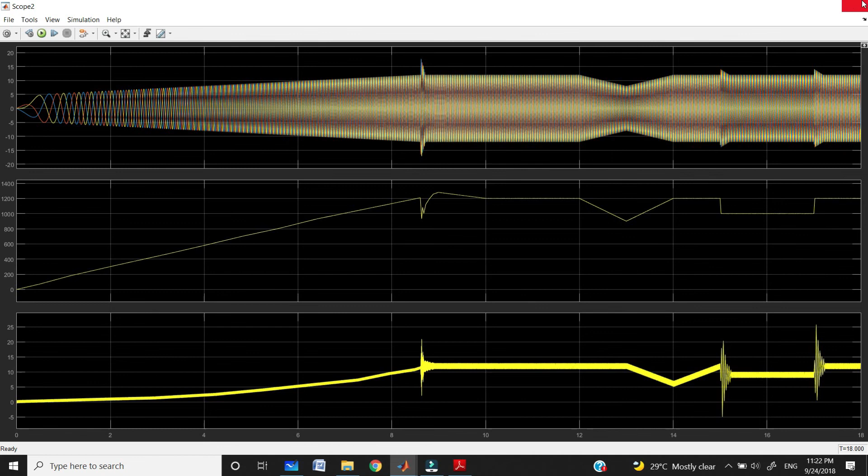So the second and third mode of operation use the same circuits, but the only thing you need to change is the mode of operation. In this mode solar is on. In second mode grid will be on, then you will get solar voltage and solar current as 0. In third mode of operation you can use both grid and solar, so we can power our load using grid and solar as well. Like that we have 3 modes.